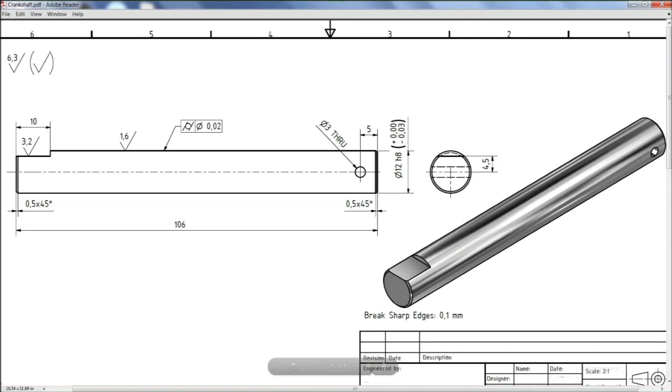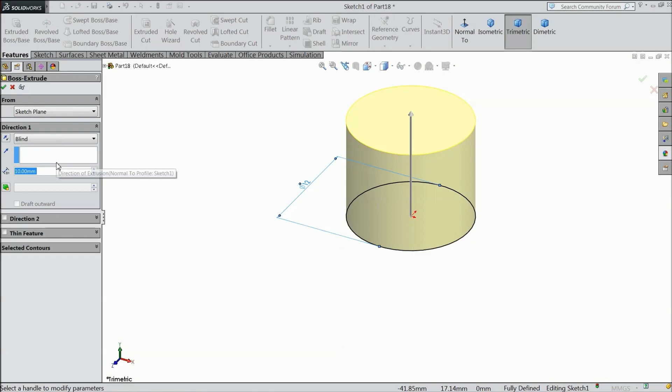Now the next part is crankshaft rod. So choose top plane and draw one circle. For the rod we will keep a 12 mm diameter, and select extruded boss and extrude up to 106 mm.

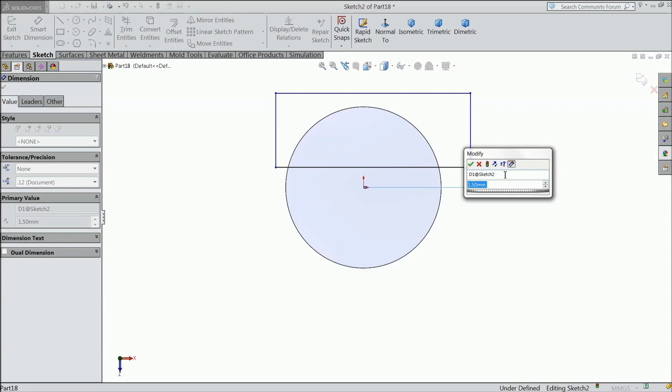Now select the top face of the rod, sketch, and we want to cut some groove for the key. Let's assign the gap at 4.5 mm, and select extruded cut up to 10 mm. See here.

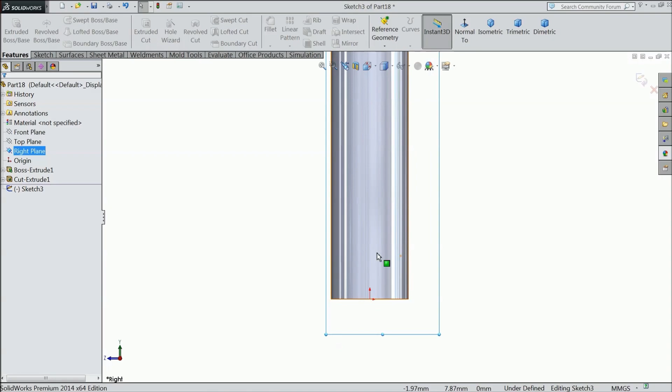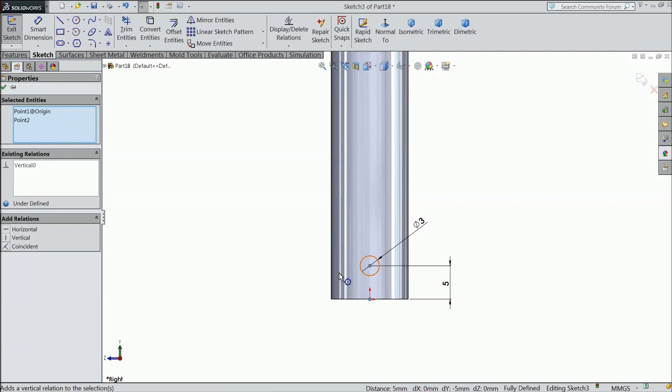Okay, now select right plane, sketch, and here we want to create a hole. Just draw a hole above the origin point. Keep the diameter 3 mm and the distance from the bottom line 5 mm. Make it vertical.

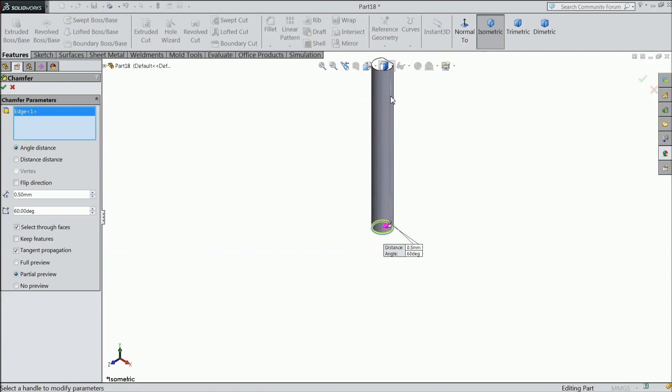Select extruded cut. Choose here mid plane. Okay, now the hole is created. Just select chamfer 0.5 mm. Select the bottom line and the top line.

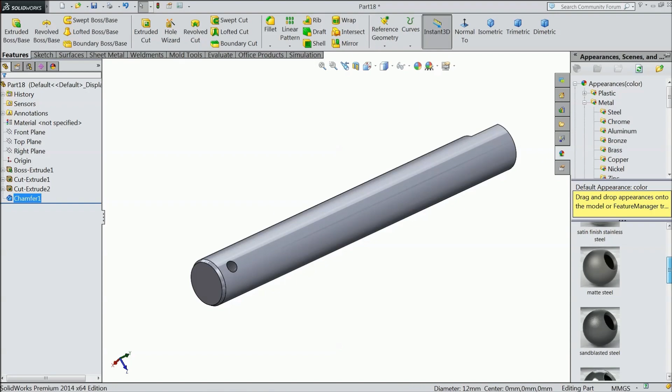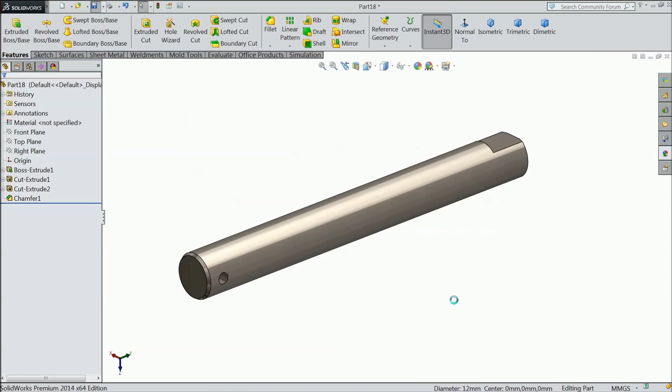So this is the crankshaft rod. Let's assign this rod a satin finish stainless steel. Now save as crankshaft rod. Let's move to the next part.